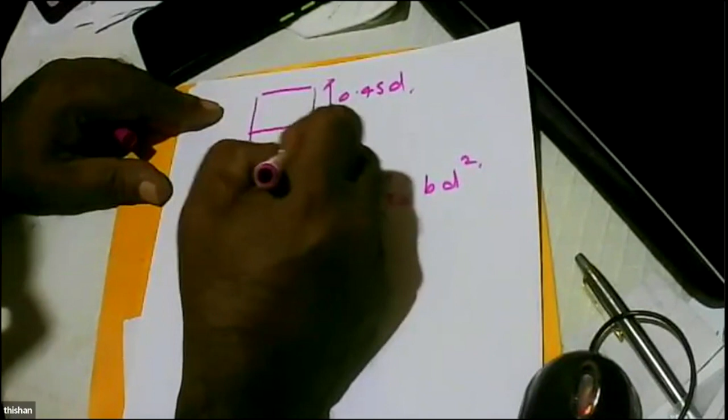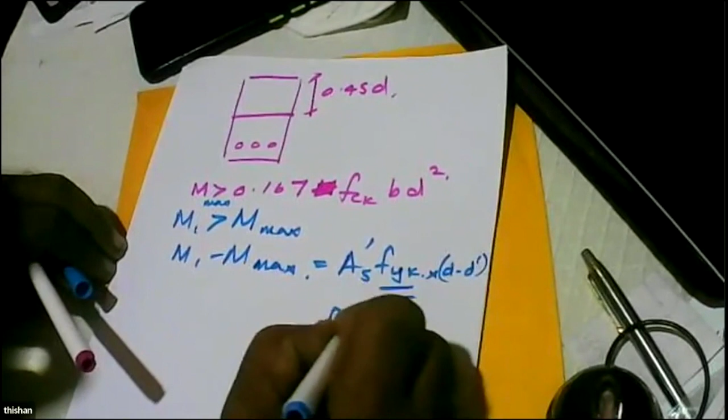Right, so basically what I said was, if you have a huge moment, a moment greater than given by 0.167 FCK BD squared, then the depth to the neutral axis is 0.45 D, and we will need some reinforcement to carry the moment. We will have a moment M1 greater than M max. M1 minus M max is the extra moment, and it has to be carried by the compression reinforcement, A-dash FYK divided by 1.15, multiplied by D minus D-dash. This is force multiplied by lever arm.

Multiplied by lever arm. So today is the 17th, 1/2024, Civil Engineering Sectional Committee Lecture Series, Lecture 7, page 1.

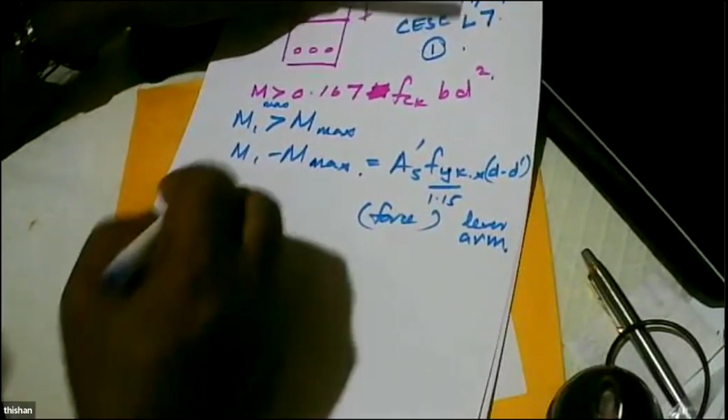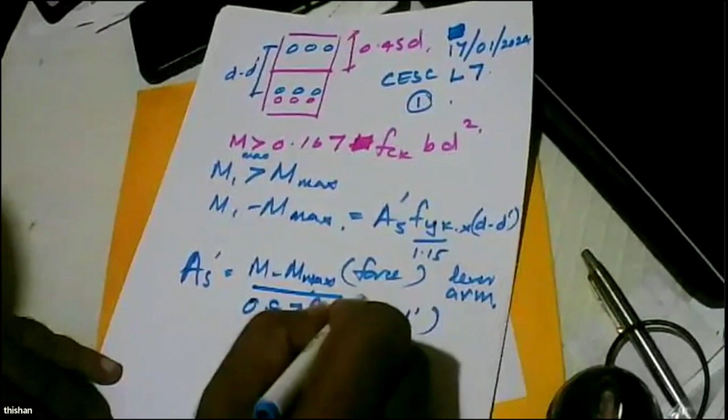So we need extra reinforcement, and this is D minus D-dash. That reinforcement can be found as A-dash equals M1 minus M max, divided by 0.87 FYK times D minus D-dash. So straight away you can find the extra reinforcement needed for the beam to be doubly reinforced, because the moment exceeds the maximum moment capacity as singly reinforced.

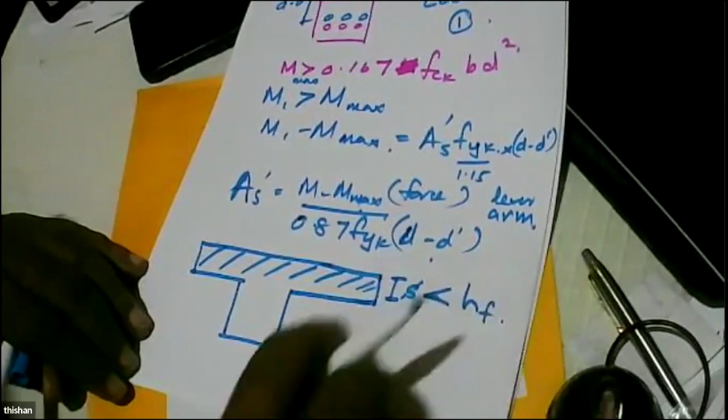Then I said, okay, this is not economical. Why? Concrete is a cheaper material, steel is an expensive material, so we should not use steel to carry bending moment. So what is better? A flange beam. But the important thing is the depth to the compression zone must be inside the height of the flange. Is that clear, Bandhuga? Yes, that is clear.

Now the question: we have a continuous beam. So this is a continuous beam. How does it deform? It deforms like this. So here, tension in the bottom, tension at the top, tension in the bottom, tension at the top, tension in the bottom.

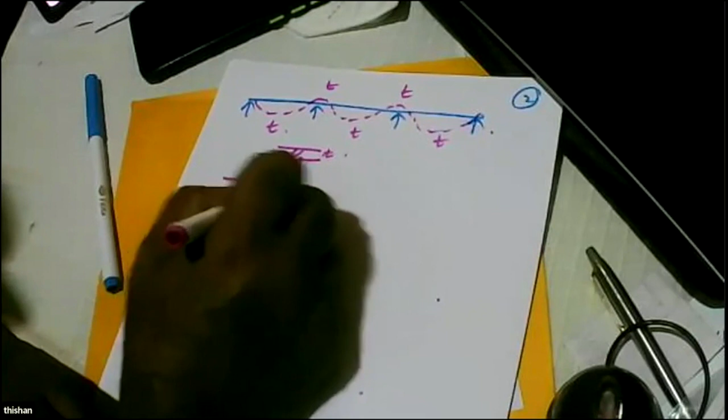So here, if it is a flange beam, here your tension is, so what is effective is only this. Here, tension is here, what is effective is this. That means in the span it's a flange beam, but over the support it's a rectangular beam. Is that clear, Bandhuga? Yes, that is clear, sir.

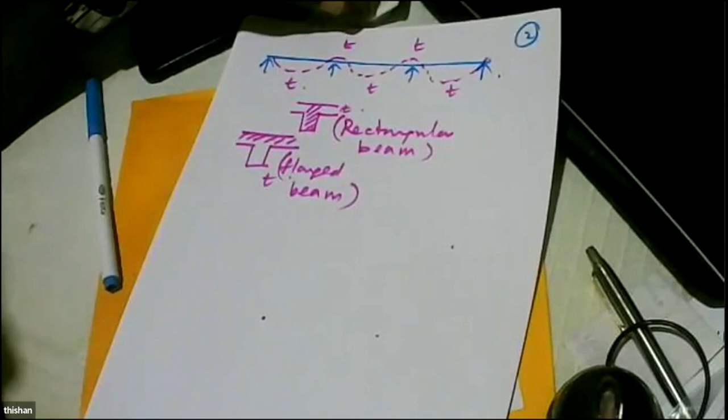Right, okay, excellent. Now let's look at the scenario. These are beams.

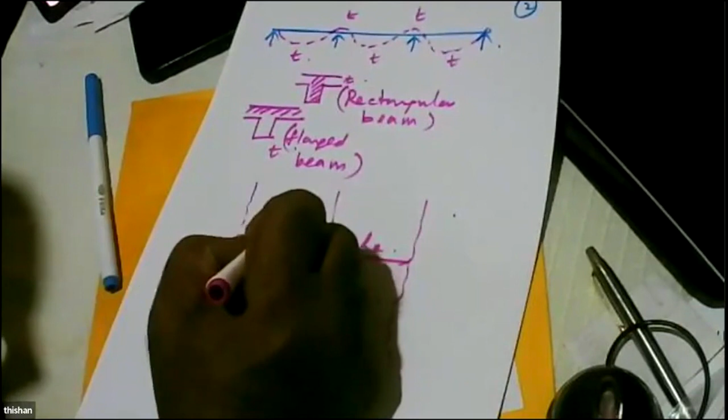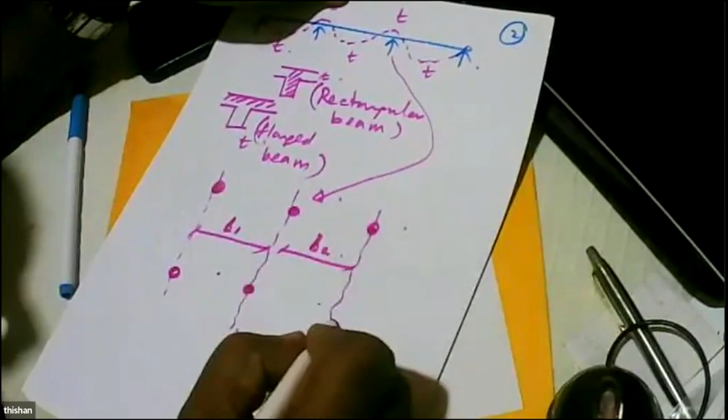So you get these as L1, L2, and so on. Sorry, B1, B2. Right, so this is a plan view, and the slabs are like this. Then we have the supports, and these supports are the same as these ones. These are supports, so the beam is continuing like this. So these are L1, L2, L3.

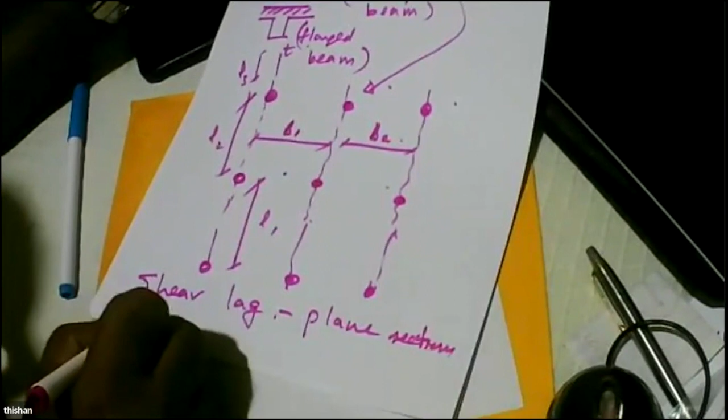Now, what happens is we have an effect called shear lag. And shear lag makes plane sections not plane. Plane sections not plane - what do you mean by that? What is the meaning of that? You have learned this formula. What is that formula? The famous Bernoulli equation. We generally call it Bernoulli formula.

And here, what is the assumption? Plane sections remain plane, strain diagram like this. But what happens is this bending somewhere here - if you draw the stress distribution in the flange, it will take a shape like this. So that means you can't say the stresses are uniform in the flange. They are more close to the support or the beam.

So we say we have an average value, but we have a restricted width. Because from center line to center line, we can't take it. This is center line of the slab. We can't take center line to center line because on the center line, the stresses are very low. So we say plane sections do not remain plane away from the beam. Plane sections do remain plane only at the beam. And we call it shear lag.

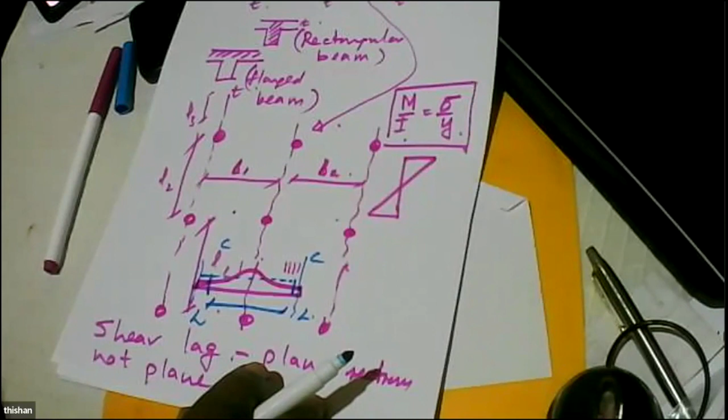Have you learned shear lag, Bandhuka? Shear lag? Anybody who has learned shear lag, please respond.

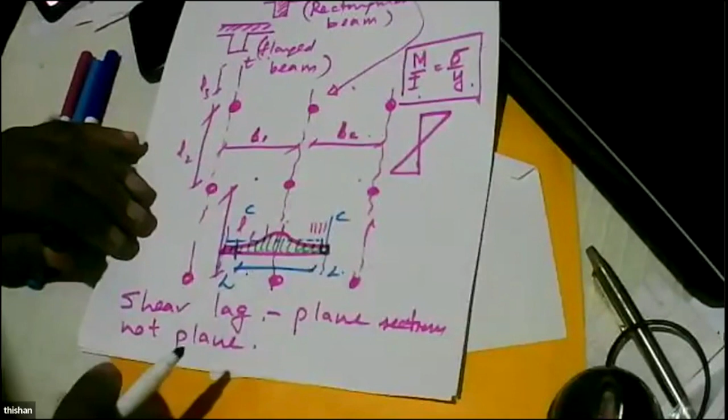If you haven't learned about shear lag - it will make the plane sections not plane. That means the stresses are not uniform. They are like this. On the flange, they are like this. So we cannot use the full distance from center line of the slab to the center line of the other slab. We have to have a restricted width.

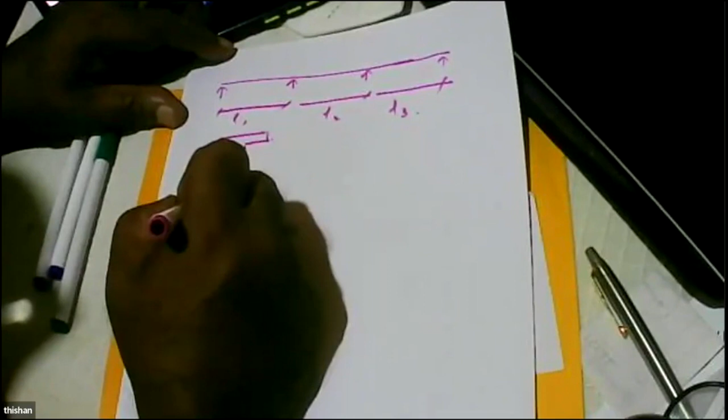So in the British code, finding the flange width is very, very easy. So as in Eurocode, but Eurocode is a little complicated, but there's nothing in it. So what the British code said was, you get L1, L2, L3, so you have flange beam here. It will be: web width, B flange is equal BW plus 0.7 times L1 by 5.

This is an L-shaped beam, slab only on one side. B flange is equal to BW plus 0.7 L1 divided by 10. Very simple. Now you might ask, what is this 0.7 L?

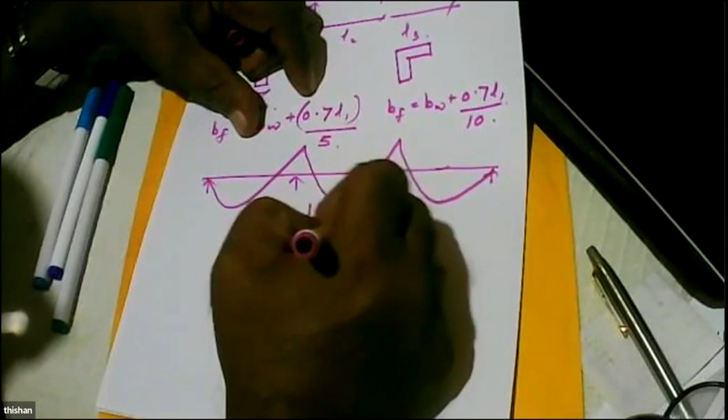You draw a bending moment diagram. 0.7 L is the distance between points of contraflexion. Here it should be 0.85 times L. There should be 0.85 times L. Distance between zero moments is called 0.7 L. It is equal to 0.7 L. They have considered it as equal to 0.7 L.

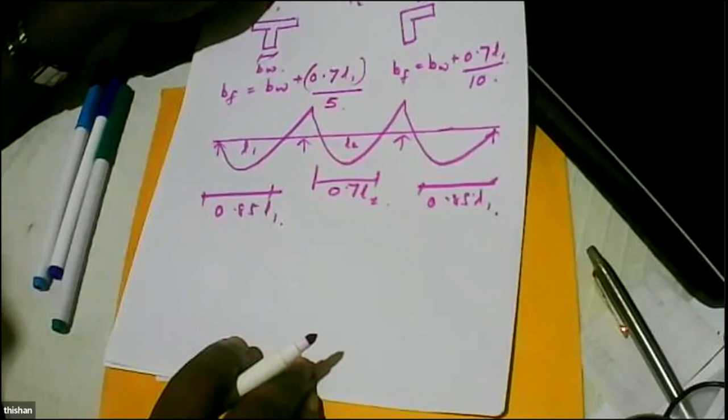Is that clear, Bandhuka? I think Bandhuka is disconnected. So can somebody else tell me whether it's clear? Yes, it is clear. It is clear, sir. Good, yeah, please give some feedback because I'm a little concerned whether I have lost the contact. Okay, right? So when I ask a question, just say yes or no, even that is enough. Okay sir, sir Bandhu, my connection was lost and I just joined again. I thought your connection is lost. Okay, yes, okay sir, right.

So now Eurocode is different. Eurocode has brought a lot of other parameters. In Eurocode, BF depends on BW as a function of B, Bi, and it's a function of Li. In British code, it's a function of span of the beam. But in Eurocode, it's a function of the distance between the beams and the distance between the supports. So this is distance between beams, this distance between supports.

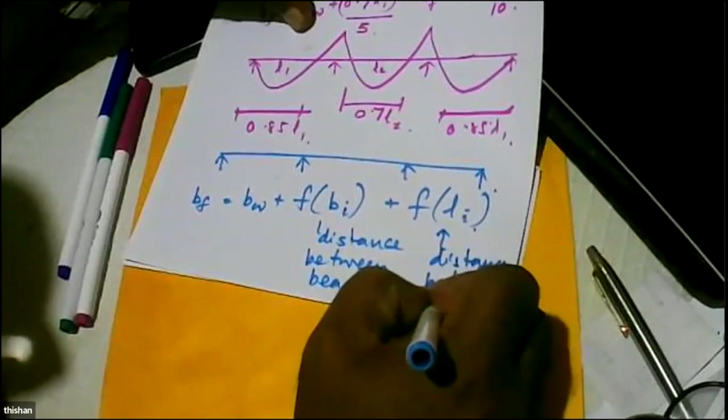Eurocode also gives the same diagram. It cannot change because it's from fundamentals. This 0.85L, this 0.7L, so each one of these will be 0.15L. Here also it will be 0.15L. Here also 0.15L, here also 0.15L.

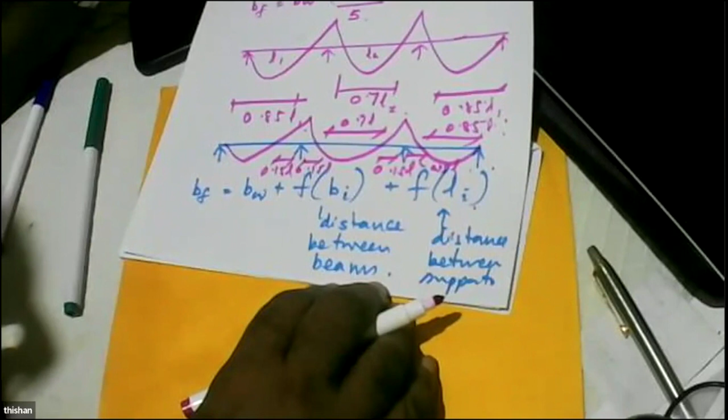Okay, got it? Bandhuga? It looks like Bandhuga has again lost connection.

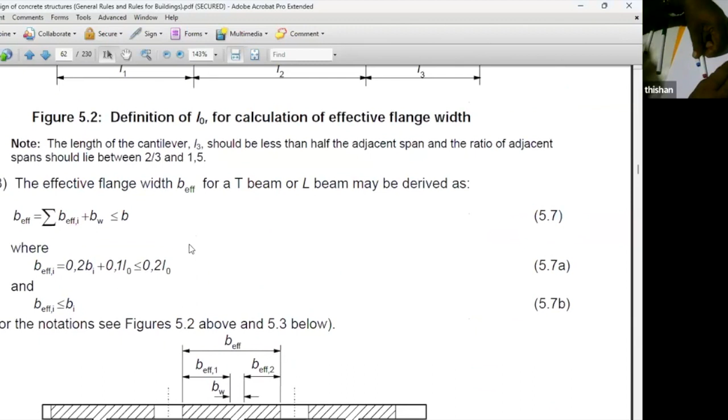Right, now I'm going to share the screen. Here you go. It gives a lot of diagrams, right? So effective flange, width of flanges, all limit states. Can you see 0.85L, 0.7L, 0.85, 0.15L, or the support?

And these for a cantilever. The effective length has to be taken as 0.15 L2 plus L3. So it says 0.2 times Bi plus 0.1 L0, but should be less than 0.2 times L0. So B effective from one side.

So what it says is, if I write it in simple rule, B flange is equal to B web plus 20% of distance, 20% of span of the slab, plus 10% of distance between point of contraflexion.

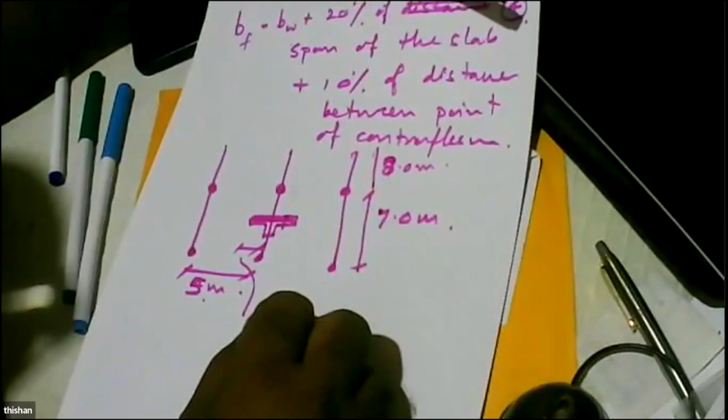Right, so the rule is F equals BW plus 20% of the span of the slab, 10% of the distance between points of contraflexion. So what is this side?

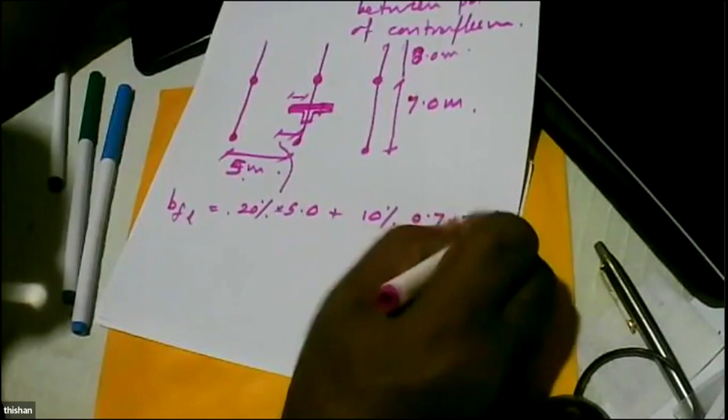So BF left, I'll say left, is equal to 20% of 5 meters, plus 10% of distance between points of contraflexion, 0.7 times 7.0. But it has to be less than 20% of 0.7 times 7.

So let's calculate. Madhu, what is this? 1.0 plus 0.49, should be less than 0.98. Is that right, Bandhuga?

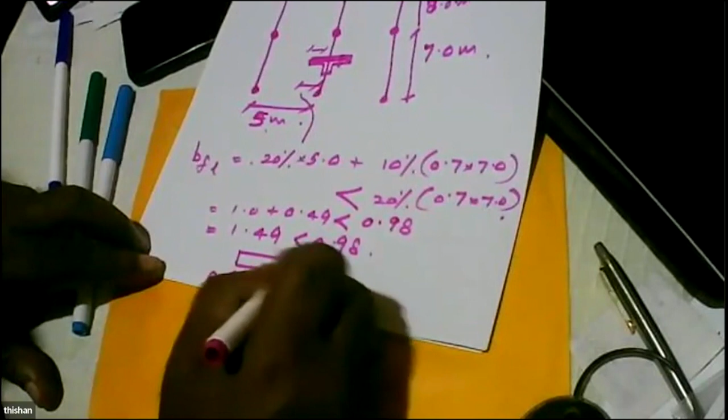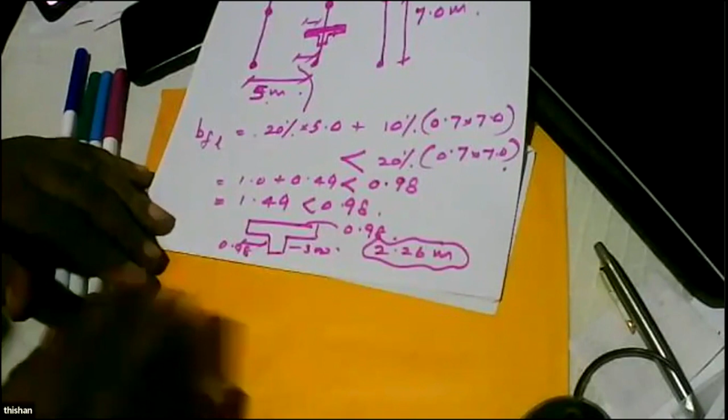So the width of the flange beam is, say, with this 300 millimeter rib, this side 0.98, this side 0.98, so 0.98 plus 0.98 is 1.96... 2.26 meters. Is that clear? Yes sir, right. Because it's symmetrical, I've considered the same value on the other side, so altogether 2.26.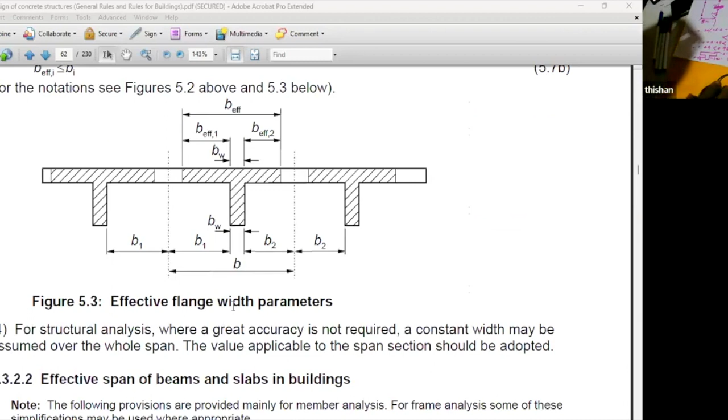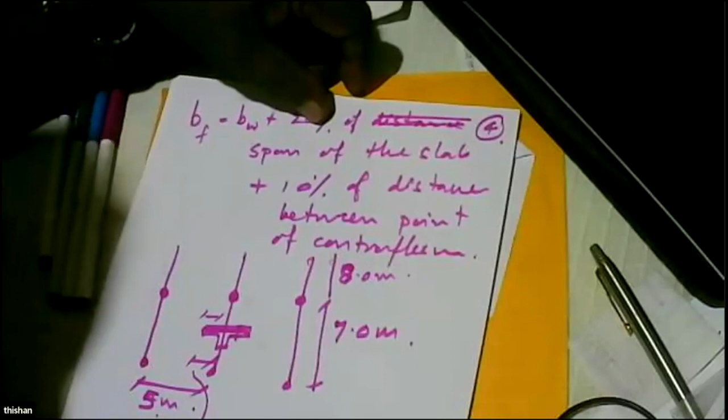So what would you use, the rule like this or the code? To me, this rule is very simple. We know 20% comes from the slab, 10% comes from the beam. What do you think, is it easy to remember or difficult to remember? But the total contribution cannot exceed 20% of the beam, that's on one side. The other side also, most of the time they are symmetrical, so you can just add up the same value.

What is the opinion? Is this simple rule simple, or do you want to look at the code? I prefer the simple rule. Simple rule is easy, sir. Yeah, because, you know, if you are a good designer, you should have all these rules in the code stored properly in your brain, so you don't have to turn to pages in the code and waste your time. Right, you are a good designer, all the rules are known to you, so even without using the code, you can still design. That's the level of ability you have to develop. So I prefer rules, why? Rules allow us to forget about the equation.

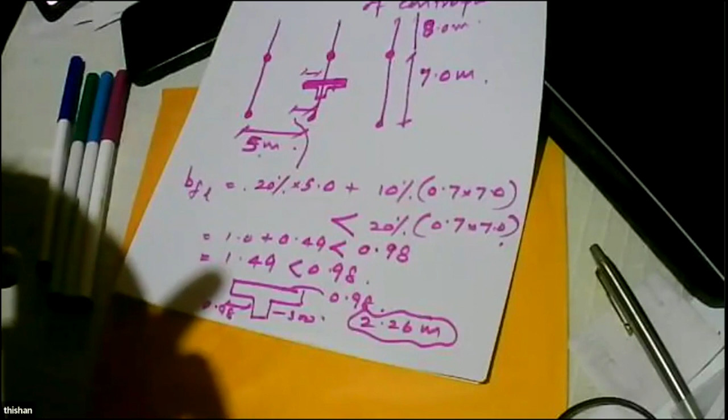Okay, sir, right. So now let's say this slab is subjected to a load of 13 kilonewtons per meter squared. What is this magic number 13? It's 1.35 GK plus 1.5 QK.

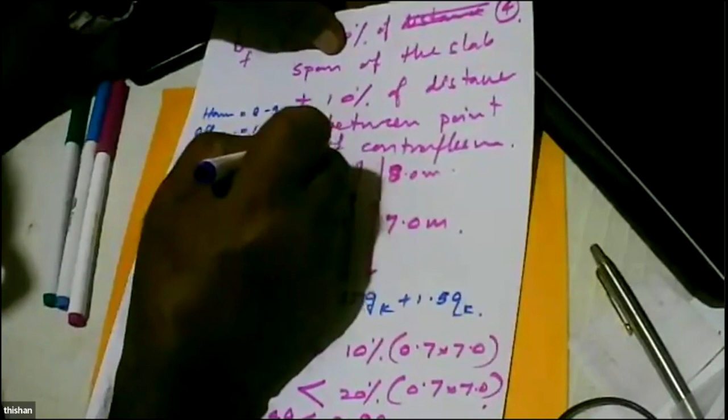Now how do I get this magic number? For a house, what is the magic number? 8 to 9. For an office building, what is the magic number? 11 to 12. If you have extra loads in the office, it can be 12 to 13, and for something like an auditorium, 13 to 14.

Right, so now let's look at the example. Same example, what is the load? Load is 13 kilonewtons per meter squared, multiplied by WL squared over 10. 7 squared divided by 10. What is the moment then? 13 into... Bandhu, what is this answer? 13 multiplied by 7 squared divided by 10. One minute, sir, one minute... Oh, but you have to multiply this by 5. 5 into 13 multiplied by 7 squared divided by 10 comes to 200 something... 318.5, 318.5 kilonewton meter.

Now let's say that is the moment in the span. So we have a flange beam. What is the flange width?

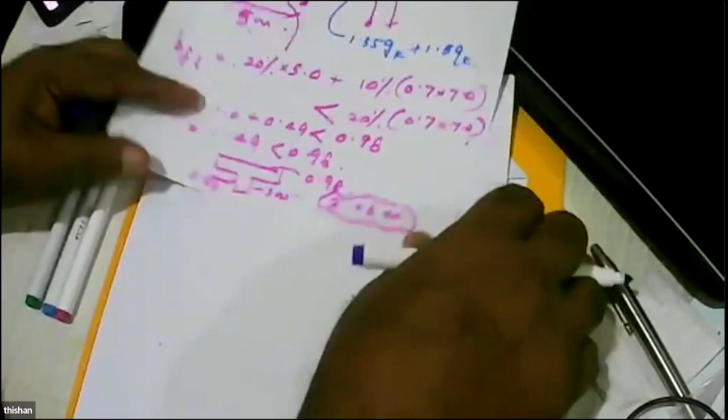2.26 meters. We calculated it earlier. Can you remember I calculated it? Yes, 2.26 meters, okay, I calculated it. Right, yes sir.

Now you want to design this flange beam. And I will assume that... so how do I design it? I have to find M over bd squared. I am using the shortcut method, no?

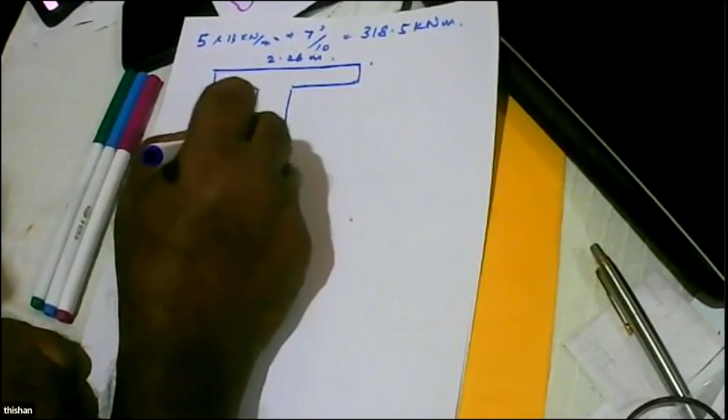318.5 into 10 to the power 6 divided by breadth 2260 multiplied by, now this is 600 millimeter deep. This 600 is a magic number. You generally don't use a beam depth more than 600 under normal situations. Even up to 9 meters, you will increase the width of the beam and be happy.

And generally you don't get spans more than 9 meters in a reinforced concrete building. Maximum span is 9 meters, because beyond 10 meters, design is also very complicated. It has additional deflections and all kinds of problems. So generally we go for a maximum span of 9 meters when selecting the grid, because 9 meters itself is about, it's huge, it's 30 feet spans. So depth is 545.

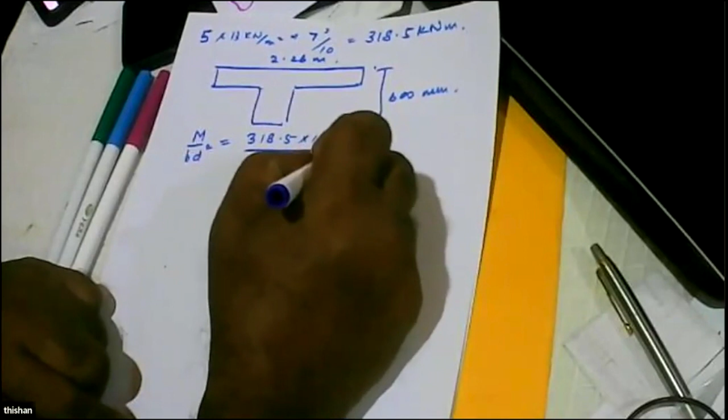So it's 1.2, something like 0.47. 0.47, that's right, yeah. Then what is 100 As over bd? Divide this by 4. 0.12.

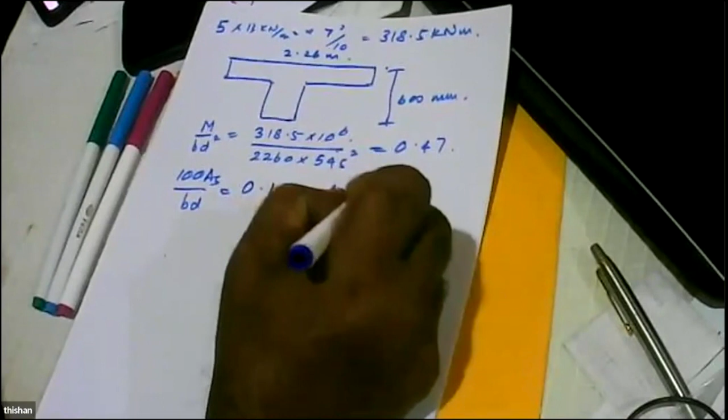Okay, yes, yes. Then what is A? A is 0.12 multiplied by breadth 2260, multiplied by 545, divided by 100. What is A? 1478.05, right.

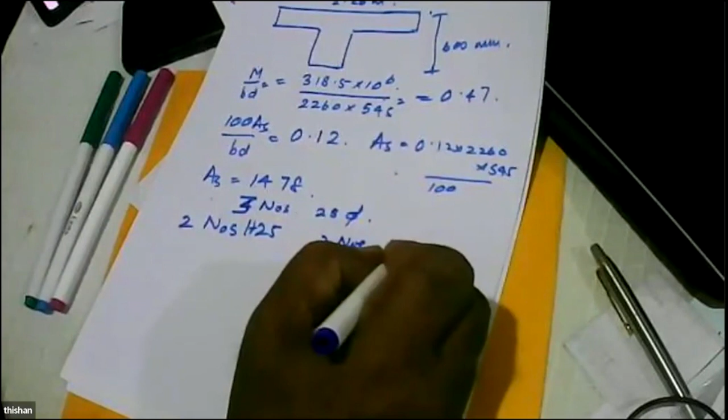Four numbers... 3 numbers of 25 diameter. Or you can provide 2 numbers of 25, H25, 2 numbers of H20. So that is 314 into 2, this is 490 into 2. What is the total area? 1,608.

When we need 1478. Is that clear? Yes, clear sir. Now, if I select this one, 490 into 3, 1470, marginally low. Now why do I select... if you want, I can select this also, because if I do a proper calculation, this will be okay, because I use slightly higher 0.12 instead of something. So 1470 is also okay.

But I select 1608. Why? Because I always provide slightly more reinforcement in the span section. What is the reason? Beams never fail at the support. Beam fails only at the span. So in the span, no harm in providing some extra reinforcement. Is that clear, Bandhuga? Yes, clear sir.

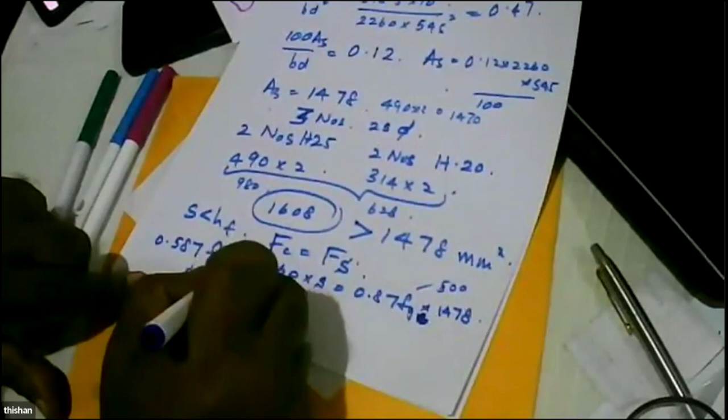0.87 FYK multiplied by 1478, the area. From this I can calculate S, because FCK is 30, FY is 500. This 500, this 30, what is the only unknown? Only unknown is S, then you can find the value of S. You might get about 40 millimeters.

What is the value for S, Bandhuka? Right sir. You might get about 40 millimeters. 16.15, sir. 60? 16.15. 16.15. 0.87 into 500 into 1478, divided by 0.587 into 30 into 2260.

S is very low, huh? Yeah. 16.15. Doesn't matter what the requirement is, S has to be less than HF. Yes, right? Okay, so now you provide this reinforcement. Will it ever fail? It will never fail, provided that you include some reinforcement here across the beam, so that no shear failure can occur here.

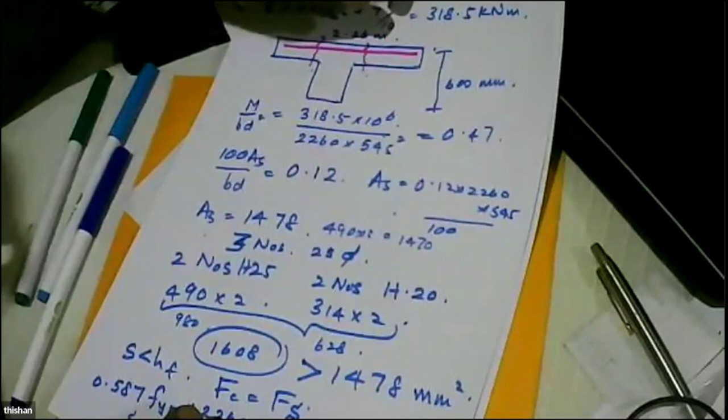So I have not covered shear to teach you how to find this reinforcement, but for the time being, we are going to provide some top reinforcement anyway, and then when providing the bottom reinforcement, my detailing is I continue this reinforcement here, I continue this reinforcement here, so there's full lap here, and that will also provide some extra resistance for shear cracking. So I will provide top and bottom reinforcement, but top reinforcement is continuous, bottom reinforcement has a joint, but the joint is done properly so that there's plenty of reinforcement across the flange to make sure the flange never fails.

Is that clear, Bandhu? Yes, that is clear sir. So I will not just provide to the middle, but I provide to the very end on the beam, right? And if you make a small bend also, that is even better. Then it has better resistance, and the flange will never ever fail. So you'll have a super strong beam. Is that clear? Yes, that is clear.

So I have covered flange beams, doubly reinforced beams, singly reinforced beams. So beams are over, I think. Is that right? Yes, correct sir. And also I explained moment redistribution. So everything on beams have been completed. And we can start shear today. Okay sir.

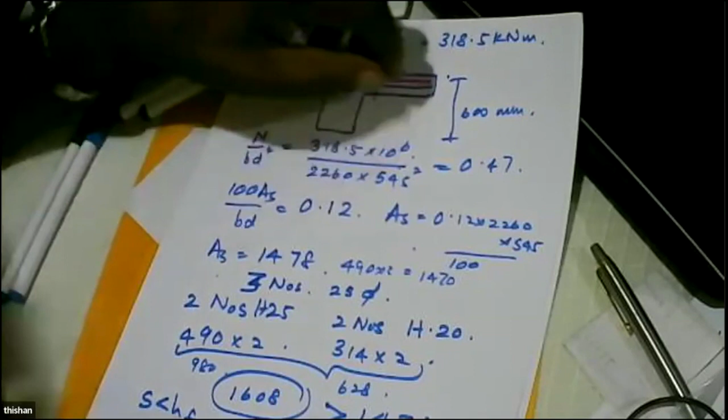Right, so I will actually talk a little bit about torsion also. Shear can be many different types, because engineers generally don't have much idea about torsion. So it's better to tell something about torsion also when you talk about shear. Then we have a beam.

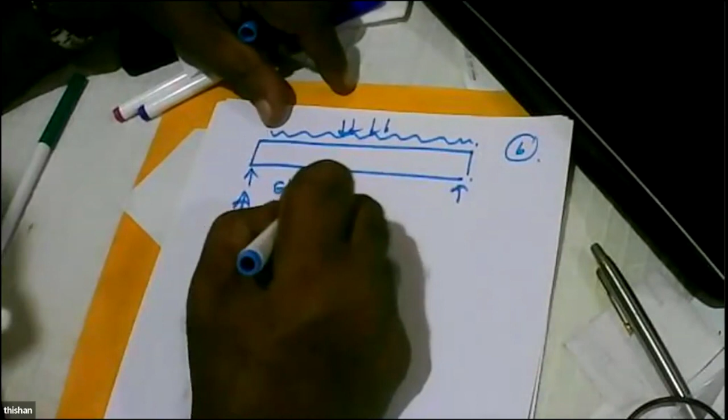We load it. So we are applying the load here. Where are we resisting? Here. So we must have shear. And always flexure is associated with shear.

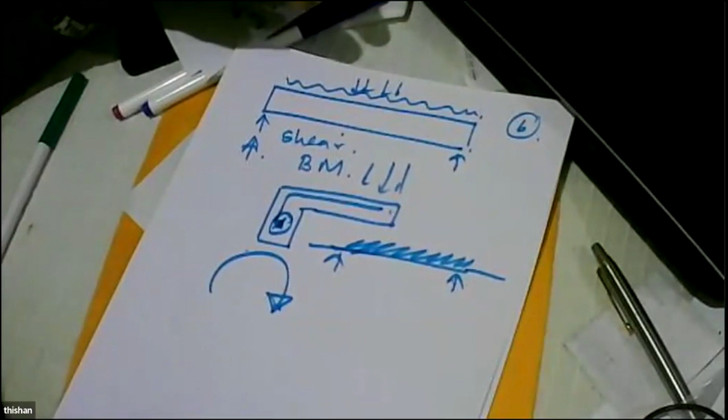But there is another type of shear. Let's say we have a beam, we have a slab here. Slab is cantilevering from this one. And beam is like this, connected, it's continuous. Slab is only here. What happens when you load the slab? You get moment like this. And the axis of the moment is like that, along the beam. Any moment where the axis of the moment is along the beam is torsion.

Now where can torsion happen in a beam? Let's say we have a transfer beam, 1.5 meter by 1.5 meter beam. And where is the axis of the beam? Here, center.

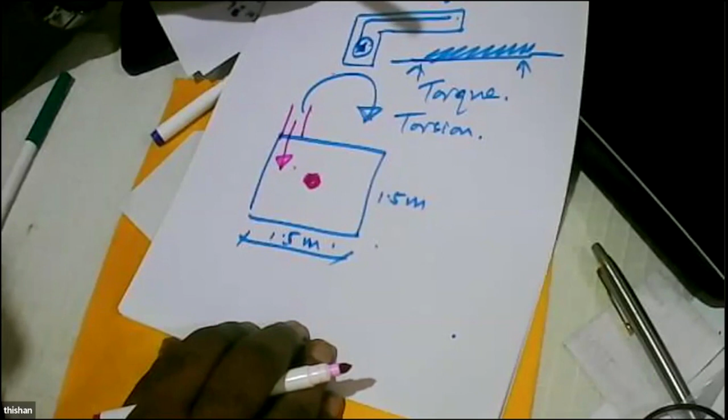And we have a wall here. The load from the wall is coming here. Why are we using transfer beams of 1.5 meter by 1.5 meter? Because we are supporting few floors, or a wall supporting few floors on the transfer beam. So there's a massive load, maybe about 2000 kilonewtons.

Distance, these 0.75 meters. This 200 millimeter thick wall. So this 0.65. So 2000 kilonewtons into 0.65, what is the value? 1300 kilonewton meters.

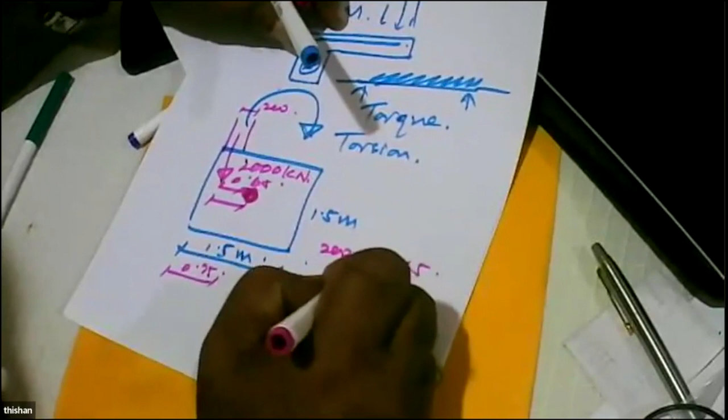So what can you say about the beam? It's a massive beam, 1.5 meters by 1.5 meters. Still it's subjected to torsion. We call this equilibrium torsion.

Why? If you do not provide torsional reinforcement, beam fails. Because this can create a massive torsional stress. If the torsional stresses are too high, you get diagonal cracks forming right around the beam, and the beam can fail. We must make sure the beam would not fail like that.

So how many shear forces? One is direct shear, the other one is torsional shear. Two types of shear forces can act on a section, and we must make sure both are resisted.

But when you perform structural analysis using a 3D program, you get bending moments on the beams, you get shear forces on the beam, direct shear, but you hardly get any torsional moments. Why? Because we are applying most of the loads on the axis of the beam. We don't apply loads away from the axis of the beam, so you don't get torsion. So you don't have to provide a design for torsion, you don't have to provide extra reinforcement for torsion. But a minute amount of torsion can be there which can easily be resisted by concrete.

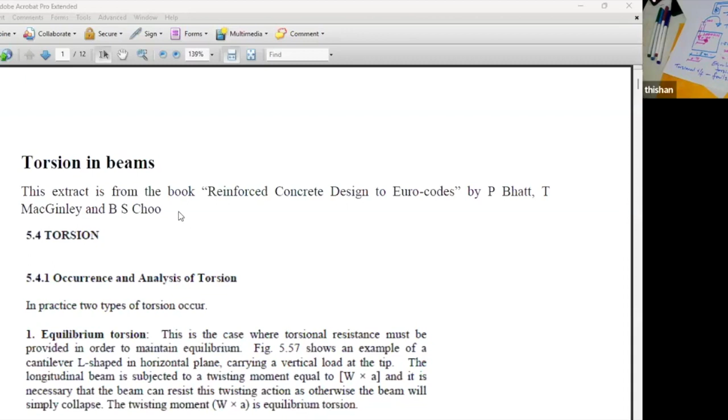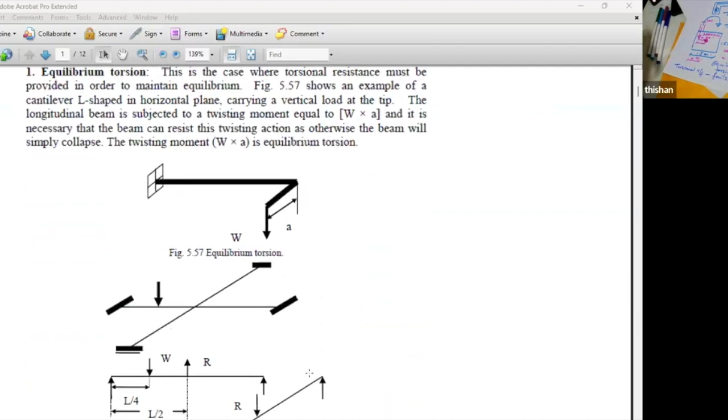But if you don't provide torsional reinforcement here, it will fail. It's called equilibrium torsion. And this theory is used very much when you are analyzing M beams and Y beam bridges. We say they are torsionless systems. The reason is what you get in an M beam or a Y beam is compatibility torsion, which can be taken into account by having a higher bending moment than anticipated in normal calculations. So we provide for it.

So what we do is, in beams or bridges, we say we are going to have compatibility torsion, and we say the torsional constant is 0. The moment you say torsional constant is 0, you get higher bending moment in the beams, and you design for the higher bending moment and higher shear forces. Finally, you find that though you are not specifically designing for torsion, you are okay. So this is the method we use in bridges a lot. And the torsional shear stress in a concrete section is like this.

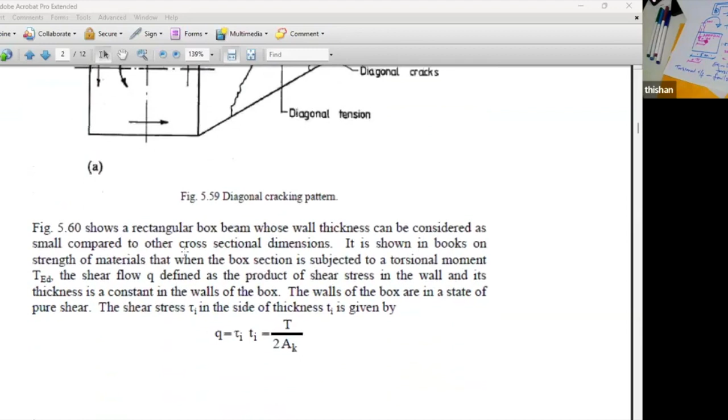And if you have a hollow section like this, the torsional shear stresses are given by this equation. Those are not very important for you to understand.

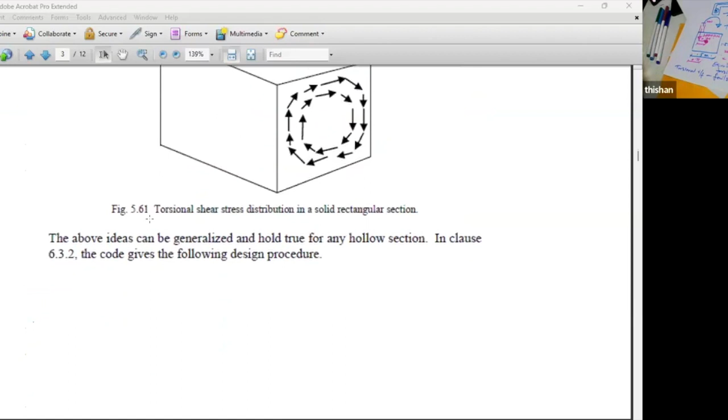So what you do is, when you have a rectangular section also, according to Eurocode, we consider it a hollow section, and we do the calculations. This diagram is directly from the Eurocode. When you are designing to Eurocode, you can see the type of diagrams and equations you have to fulfill. Very difficult to remember and recall all these. So what do you do?

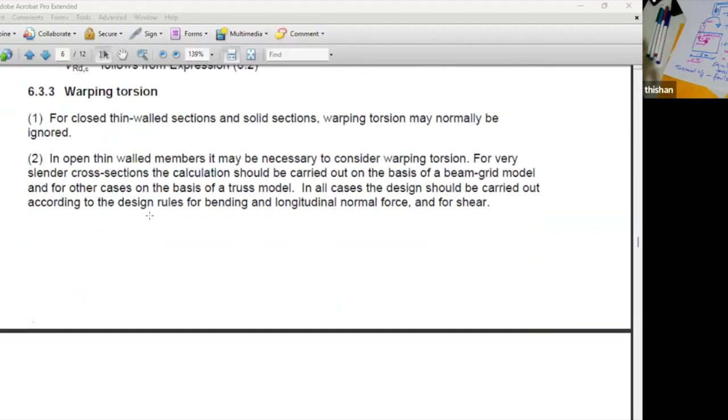Very simple, what we do is - all the theories are given, lots of equations - what are you going to do? Look at the example given by Mosley on design for torsion. The example is included. The moment you look at the example, you will understand how to deal with torsion. So torsion is not a major problem.

You can see there's an example, and in the example, how to do the calculations is given. So what you have to do is go through the example, try to understand the method given in Eurocode, because if you try to understand the code directly, you will never understand it. What is this? This is a code.

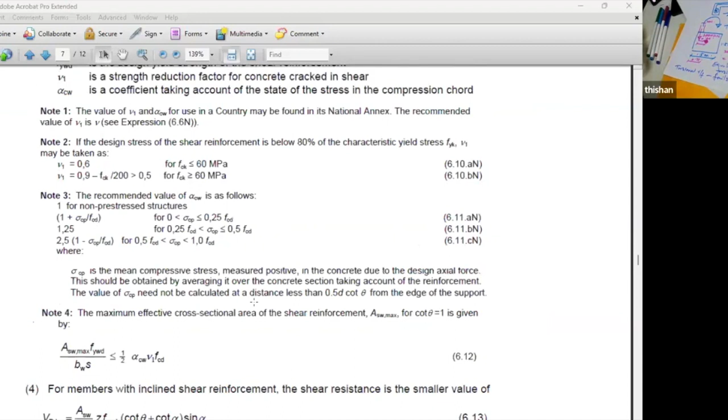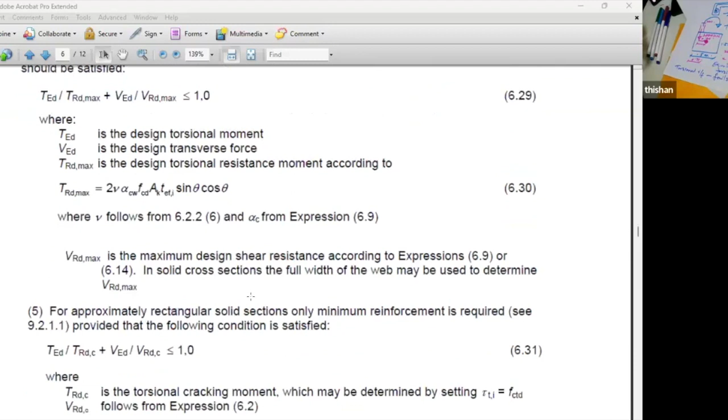Mandu, can you understand this kind of complicated stuff? What do you think, Mandu? Do you like all these complicated diagrams and equations? No sir, it's very difficult to understand. Yeah, it's a killer. You don't do it.

Then what do you do? Forget about all that. Just go through it to understand what the provisions are. So all these are provisions, and then go through the example. Then you will understand it's not that difficult, right?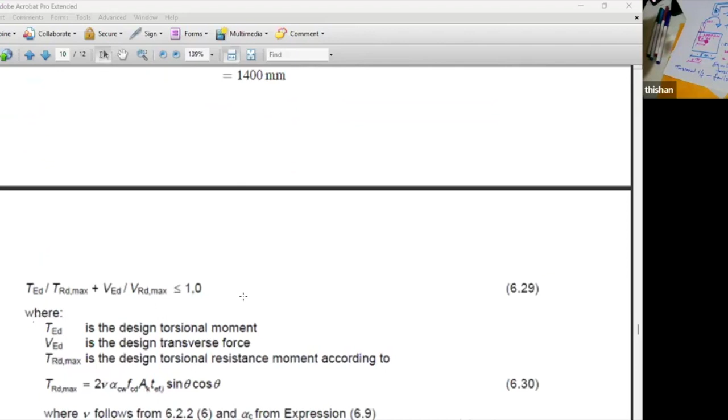So in the example also, I have given the equations. If you directly go to the example, it will be easy - but first just look at the code, just glance through it. You don't have to understand it, but you should make your eye used to it. After that, go to the example. But in the example also, I have given the code extracts and the equations. I have modified the example - taken things from the example and put things in between from the code - so that you will understand what you are doing.

So you can put it on the computer, write a spreadsheet for this. Otherwise, doing a torsion calculation is a killer - very difficult if you try to directly use the code. Why? Because the code covers all possible scenarios. But when you are designing a beam for torsion, it's not a big deal. So what you do is go through the example and put it on a spreadsheet. Whenever you see a moment, you feed the moment with the dimensions, then the rest can be calculated.

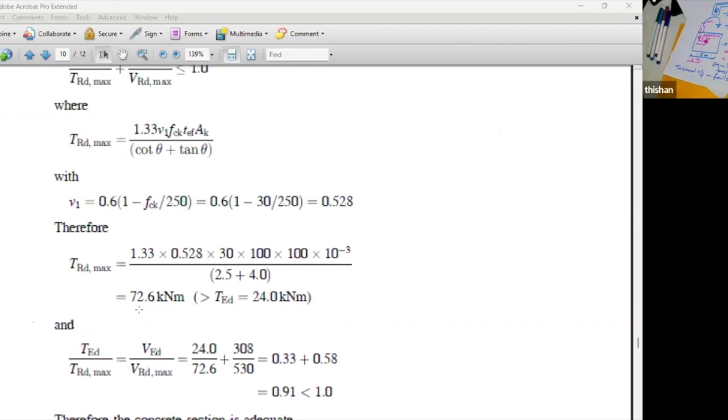Got it? Yes, got it sir.

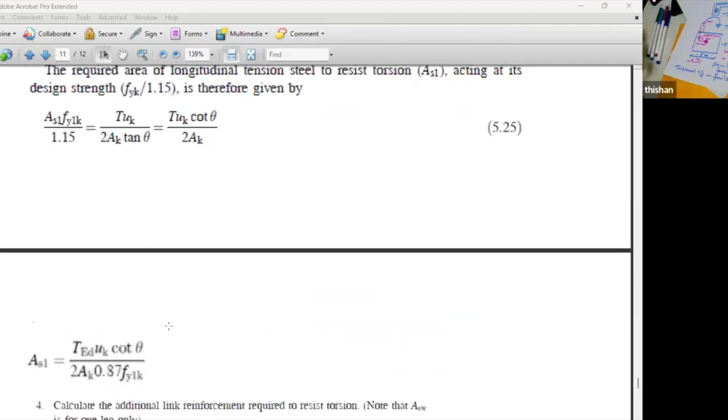See, lots of calculations, lots of theories, lots of proofs, lots of things. So I have put everything inside so that when you are doing the calculations and using the equations, you will understand why you are doing it. So whatever is relevant is in the note - how those equations are derived, everything is in the code. From the code, I have given the information. It's very easy, you just have to go through the example.

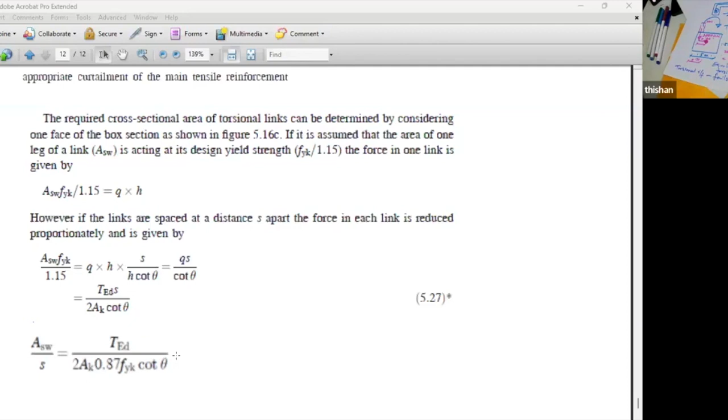I think we have shared this note, Bandhu. Yes, that is in our Google Drive. So please go through the note - it's very easy to understand, not a difficult thing. It has an example - just go through the example, and within the example also I have shown the relevant equations, so you can easily follow it. In the textbook, the theory is at one place and the example is at a different place. What I have done is put it all together so you can understand the theory and the example all in one go. Thank you sir, it's a very, very valuable document sir. Please go through it, because it's very difficult to teach these things. These are the things engineers should read and understand.

Okay, but a very good document is available for you to understand. It's better than the textbook, right? So go through this note and try to understand how you do torsion, but you have to understand torsion comes only where?

Transfer beams. If you are designing the transfer beams of a 30-story building or a 20-story building, you have a transfer floor, then you must be very careful, very careful in modeling. Later I'll show you how to do the modeling to get the torsional moments.

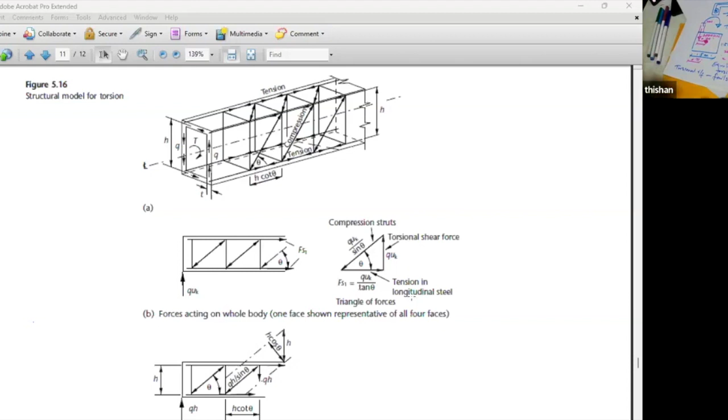If you ask me to design a 30-story building, Bandhuka, I will ask you to keep all the codes with you. I say I don't want codes, you keep the codes. And within 1 week, without a code, I can still give the whole design with a challenge. What is the challenge? If you find a single mistake in my design, I'll give you

10% of the design. And if you find 2 mistakes, 20%. If you find 10 mistakes, I don't get anything, you get everything. And then I'll say, if you optimize my design by 10%, I'll give you 10%. If you optimize my design by 20%, I'll give you 20% of the fee.

One question. So how do we improve ourselves to do those level of designs? Yes, you have to read the books, read them early in the morning, and see how the equations are derived.

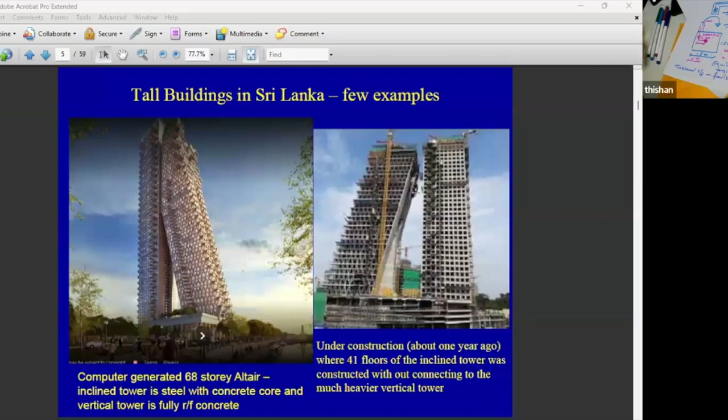So I have actually checked it, whether it can be okay. So we had a model where we did not have - we had only up to this layer. So these are the pre-stressed concrete balconies of Clearpoint, another landmark building.

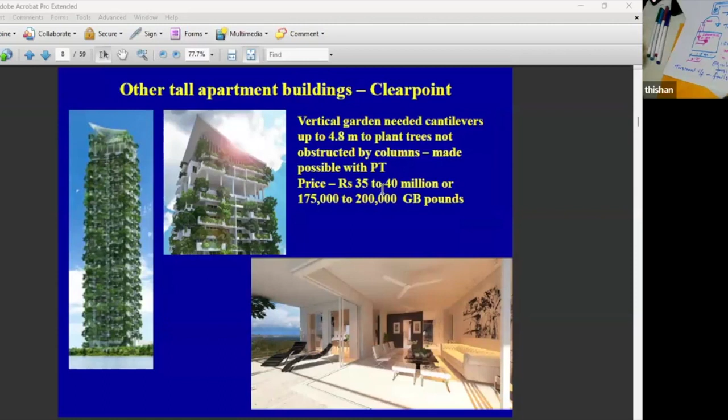Right. So today what happened was actually I lost the host due to some unstable connection. Now I can't control the members. Okay.

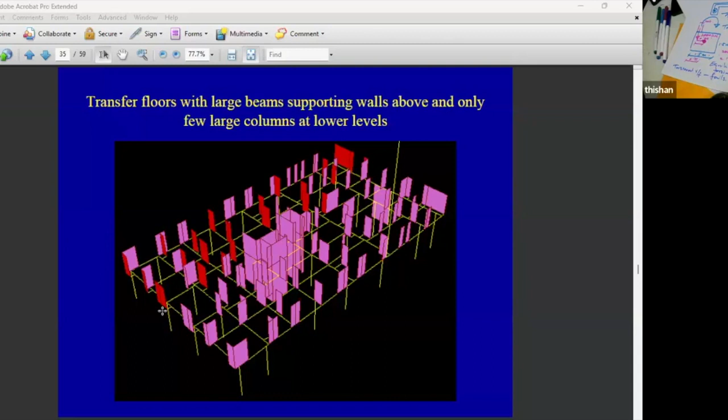When you put a rigid arm, you can put the wall in the correct, actual location. So when you extrude and see, you don't see it directly - you see the walls in the actual location. Can you see the edge of the beam? Yes sir. But in the extruded model view, it is not at the edge of the beam.

We have deliberately created the location at the edge of the beam. Deliberately - otherwise it will appear on the center line, and then it's wrong. When you analyze, you don't get a torsional moment if you put anything on the center line. If you want to find the magnitude of actual torsional moments, you must put the members at the correct locations - then only the torsional moments will be generated. Is that clear? Clear, sir.

In this extruded view, our rigid arm and the beam extruded parts are coinciding - is that correct? Coinciding, so you can't see it actually, but the extrusion will clearly show you that they are not on the center line. Yes sir, that's the important thing, right? So these are tricks, very valuable tricks for designers.

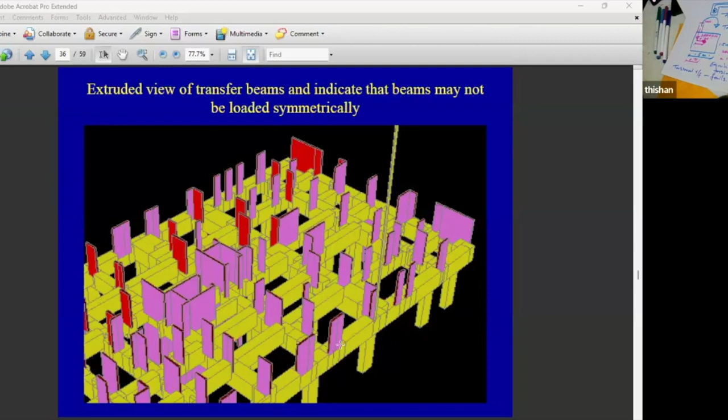So you can see - this is something I have shown you already. This is another important thing. Can you see the piles? Yes, we can see, sir. And the pile cap? Yes.

What is this building? This is a building at Nugegoda for Porsche, close to what you call Valley Park, on the Open University Road from Nugegoda, Supermarket Junction. On the Open University Road, there's a road connecting to Pagoda Road, and just after that you get this building on the left-hand side. It's a 14-story building.

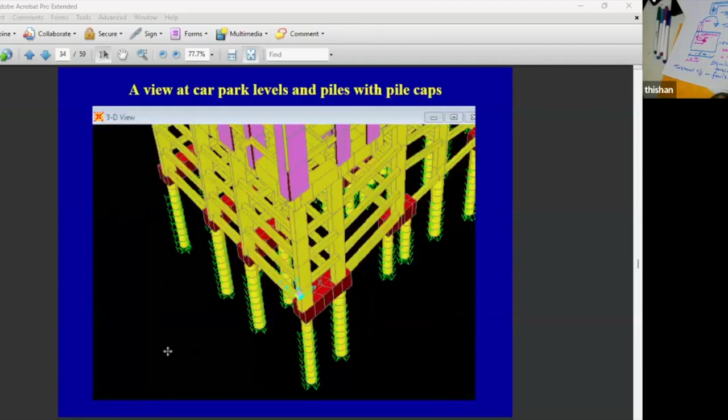So you can clearly see, we have modeled foundations, piles, foundations, columns, beams, transfer plates, transfer beams, the walls above - everything in one go. Very advanced modeling, using SAP 2000 - a simple program, but a very complicated model has been made. Is that clear? Yes, yes.

So, do you have the ability to create a model like this? If you don't, don't worry, I'm going to show you later. I have the license for SAP 2000, so I'll show you how to use SAP 2000 to create a model like this. And that's where the money lies, because your ability to create a model like this will make sure you are eligible for big payments. And the other important thing - you can see the transfer beam is coming and connecting here.

You will find the bending moment on the column is much higher here than here. So what will happen? Where will you get the highest reinforcement in the column, at the bottom or at the top? Just below the transfer level, you might find the reinforcement needed in the column is much higher than the reinforcement needed at the bottom of the column. Have you ever heard something like that? The reinforcement needed just below the transfer plate or transfer beams is much higher than the reinforcement needed at the bottom of the column. Have you ever heard something like that?

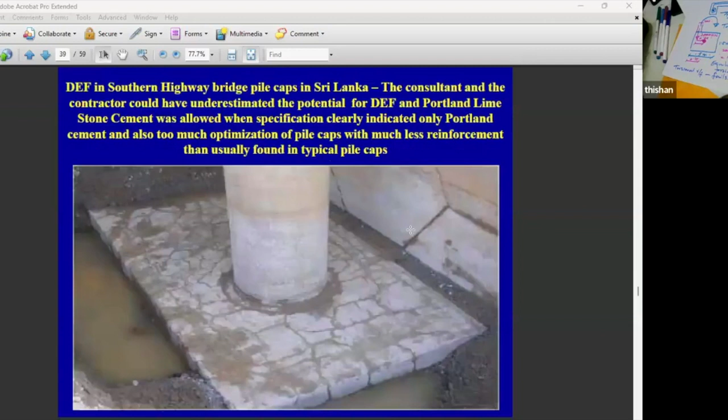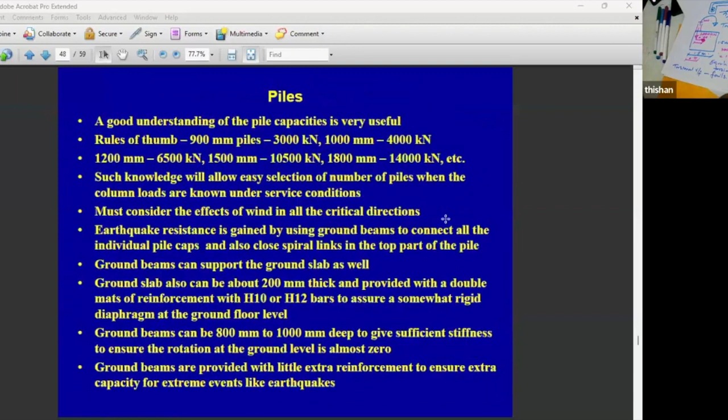So there's a lot of useful information, including how to model the foundations using springs, and a lot of useful information. And with that, shall we wind up so we can start the proper shear, the flexural shear design next time, Bandhu?

Okay, sir, there are a few questions. Yeah, what are the questions, please? Yeah.